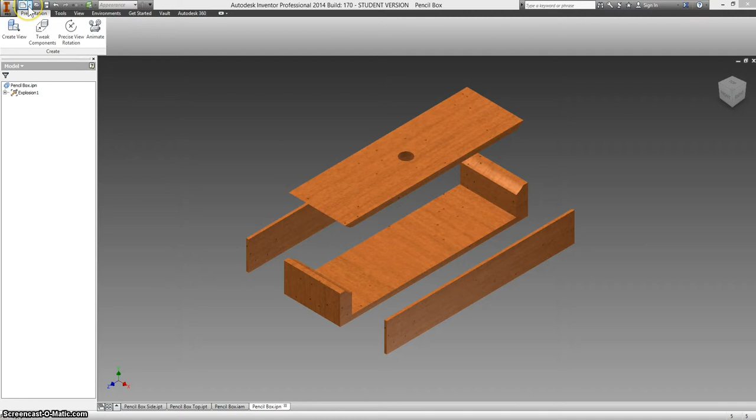We're making a drawing file. We're going to change this from C size paper, which is a little too big. So we're going to right click on sheet 1 and edit this. We're going to change this from C, which is 17 inches by 22 inches. And most paper is actually A size, that's 8.5 by 11 inches.

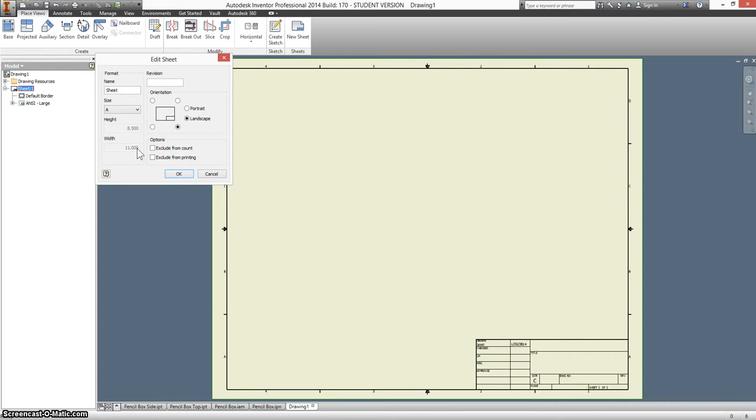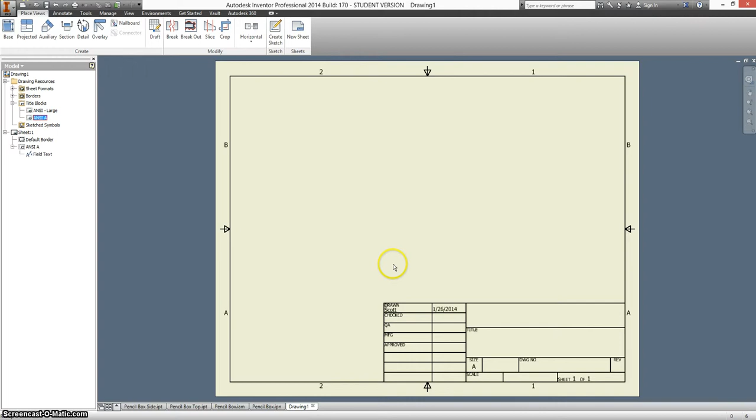So let's click OK. And now this title block is way too big, so we're going to right click and delete the title block. We're going to select a new one from Drawing Resources, so expand it, expand title blocks, and instead of ANSI large, we're going to select ANSI A. Double click. That makes a much more reasonably sized title block.

And now that we have all of that finished, top left we have the important part. I'll put in the base, and let's start off with the part that most people would start with. So we're going to browse and start with the pencil box base.

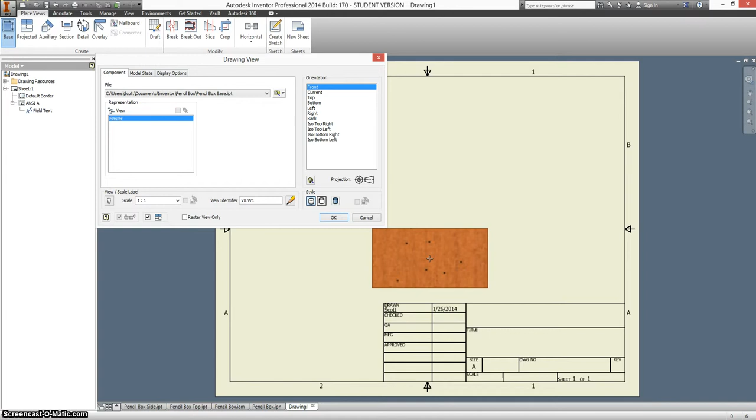Okay, now it thinks this is the front view, and this is actually a side that we're looking at. So the left side is probably more appropriate, but it's way too big for this paper. This is the actual scale, so an 11-inch long paper, this is 10 inches. This isn't going to work well, so we're going to change this to half size.

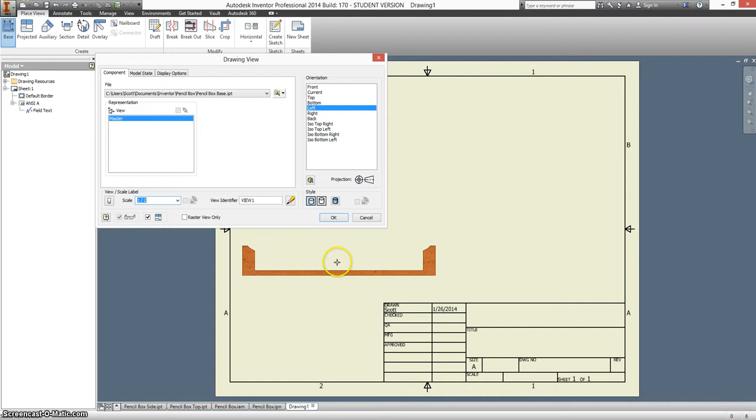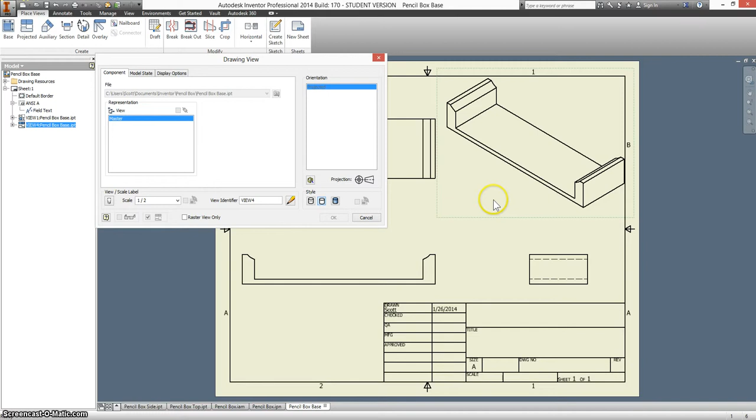We're going to click once to set down where the front view is, click the top view, down into the side for the side view, and then straight up from the side view to make an isometric view so they know what it is they're supposed to be looking at. Right click and hit create. Double click the isometric view. We're going to select shaded and click OK.

Notice that when I first put in the bases, I did not select OK. I just clicked on the paper where I wanted them to be.

We're going to go to annotate, and anytime that we add notes to a drawing, you're annotating it. So we're going to add a dimension, which is also an annotation, to show that from this side to this side is 10 inches long. And this is going to allow us to add extra text if we want it, and it defaults to let you do that for every dimension you create. We do not want to worry about that, so I'm going to uncheck Edit Dimension when created.

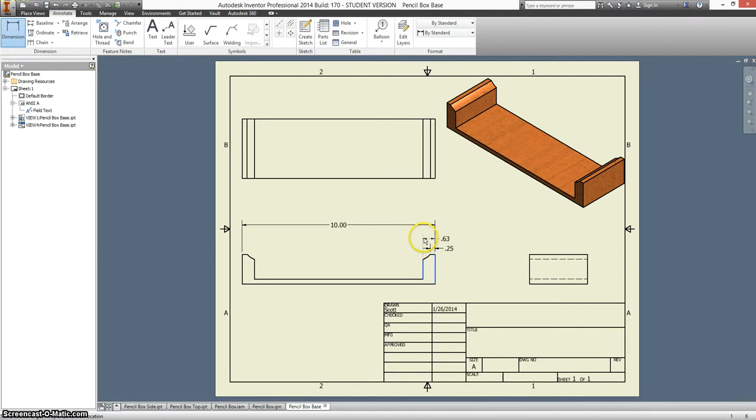We're going to also need to know how far it is to this first point, which we had set to 0.25, and this is going off the edge, so I'm going to change and make it on this side instead. So this is 0.25. I'm going to click on this edge again and say from that edge over is not 0.63, we said it's 0.625. So let's double click that dimension, and under precision and tolerance we're going to change it from only going to 2 points after the decimal to 3 points after the decimal, and select OK.

Alright, so these are all the width dimensions they would need to know. We'll put in a note to let them know that this side is the same.

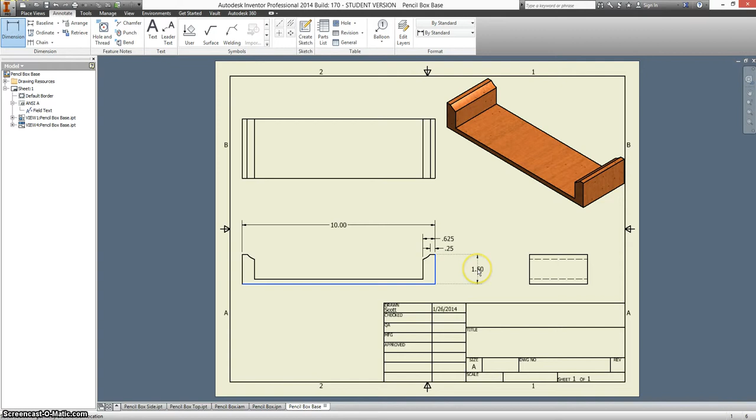And let's continue dimensioning. So we want from the bottom of this up to the top is 1.5 inches. From the bottom of this to this point should be 0.25, and that's showing up as something that's incorrect, so I may have to go back and look at that. And then the easiest one for other people to follow, even though it is the same as saying from here to here is going to be 0.125, we didn't actually dimension it that way. So instead, I want you to dimension from this point to this point, and that's 0.625.

Okay, and then the only other thing they would need to know is that the width of this is 3 inches. Remember, it started as 3.5. We took off a quarter inch from the left and the right side. And half of that quarter is from the table saw. The other half is the side that we're keeping for left and right.

So before I go further, well no, let's finish all of our drawings first. This drawing is finished, but we're going to add notes to it. So we're going to annotate it with text, and we're going to say symmetrical. So put your caps lock on. And that lets other people know that this side is the same as this side.

We're going to put in our name here. Forgot I had my caps lock on.

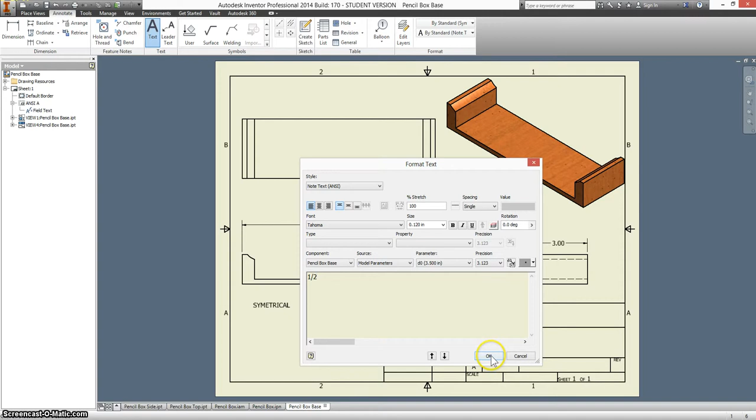Lastly, we do need the scale in here. And we said this is not a 1:1 scale, this is a 1/2 scale. So they know, looking at this, that even though this is only 5 inches long, this is representing a 10-inch long piece of wood.

Okay, now we're going to select Place Views and make a new sheet. So our old sheet is still here under Sheet 1. Our new sheet, Sheet 2, now already has the right size paper and the right size title block.

Click where it says Base. We're going to search for our side. And this is 3:1, this is way too big. Let's make this 1/2 scale.

Again, I'm not going to click OK. I'm going to switch this from a front view to a left view, and I'm going to click on the screen. Do not click OK, click on the screen. That sets the front view, the top view, the side view, and an isometric view.

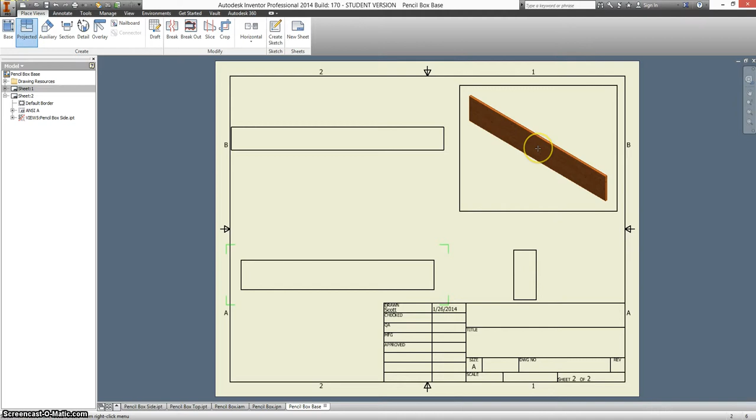Right click, select Create. You get a little red box if you're not right on top of the item. So double click that. We're going to make it shaded again.

And now we're going to go back and add notes to it. So dimension it first. We can just select the line and click above it. So it's 10 inches long, and it's 1.5 inches tall.

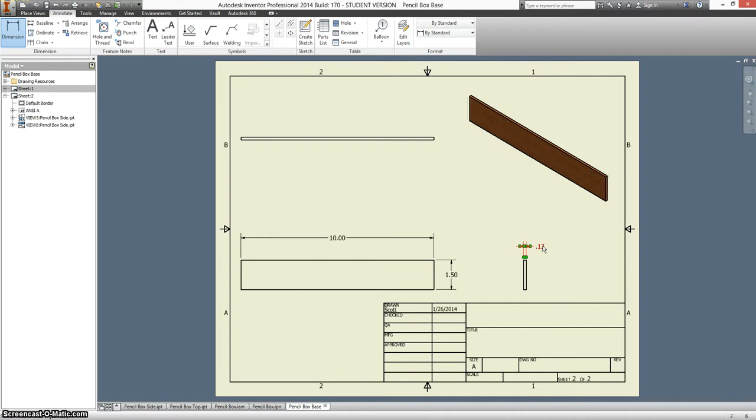And if we click on the left side and the right side, this will tell us that it's 0.13, which again isn't quite right. So click on that dimension. We're going to change the precision and tolerance to 3 points after the decimal. Select OK.

And again, we're going to add in your name. We're going to add in a title. And we're going to add in the scale.

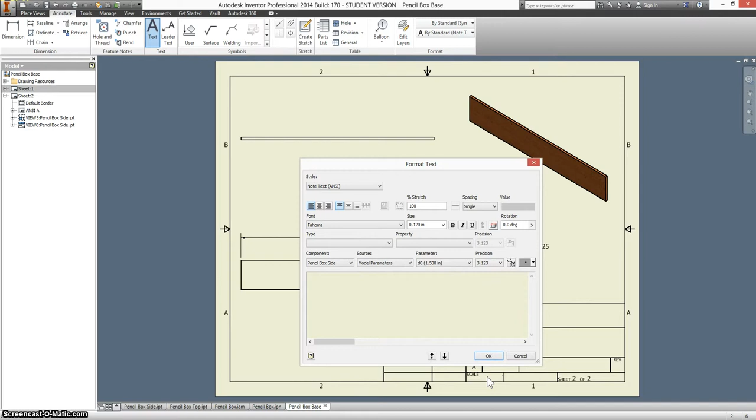Switch back to Place Views, New Sheet, Base, and now this time we're going to add in the top.

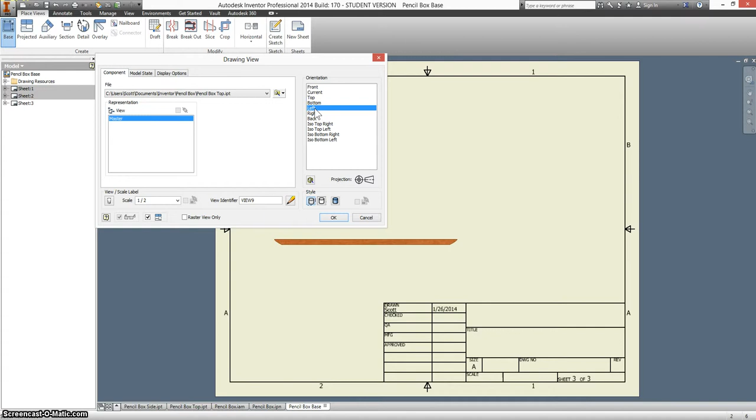I'm going to switch to a left view, and actually, let's see if we can get... no, it's not going to let me do what I want. So here's the front view. Do not click OK, just click on the screen. The top, the side, and an isometric view.

Right click, create, double click to make this one shaded. And annotate. This time we have a circle.

Anytime we have a circle in a drawing like this, we're going to add a center mark. Just click on the outside of it, and that'll allow us to dimension to it.

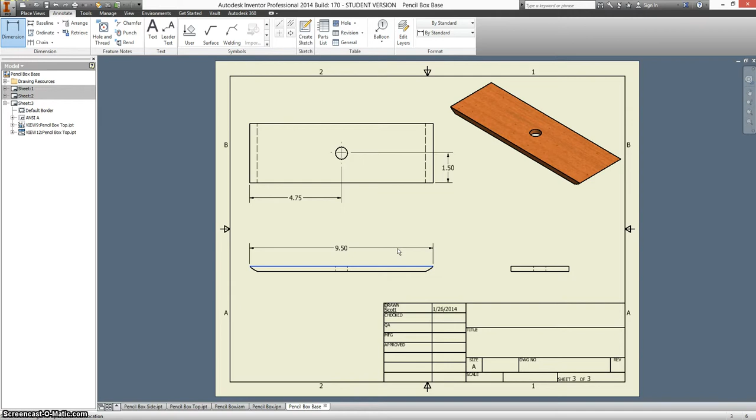So we're going to say from this edge to this point is 4.75, and from this side to this point is 1.5. This whole piece is 9.5 inches long.

If you zoom in, do not click on the green dot. Click on just above or below it. This is selecting a midpoint.

So you could say from this point to this line is a distance. We don't want to select that. We just want to know what the radius is. So the radius on this is 1 inch.

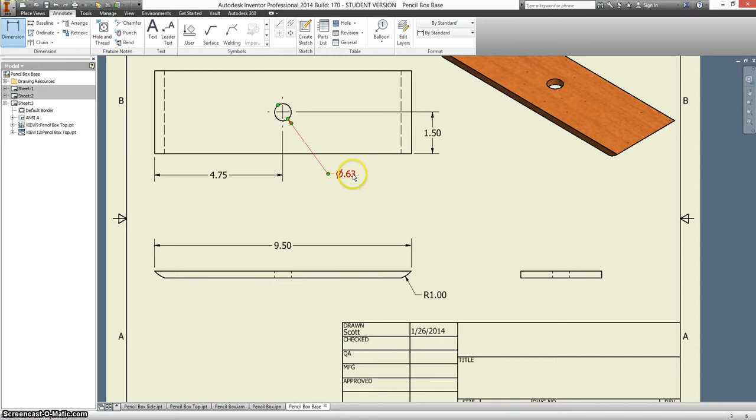And we also need to know that the diameter of this should be 0.625. So we're going to switch the units, make it so it goes 3 places after the decimal, and the last bit is just knowing that this is 0.25 thick.

We're going to add text to it. Again, put in your name, put in a title.

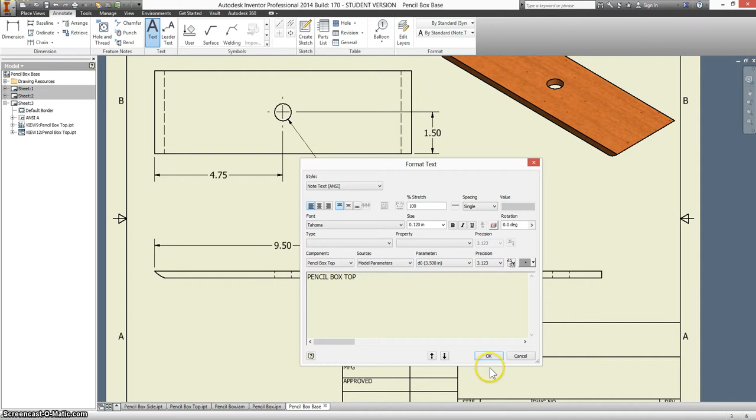If you hold down your mouse wheel and move your mouse up, it'll drag the screen. I'll put in a scale. The scale on this is again 1/2.

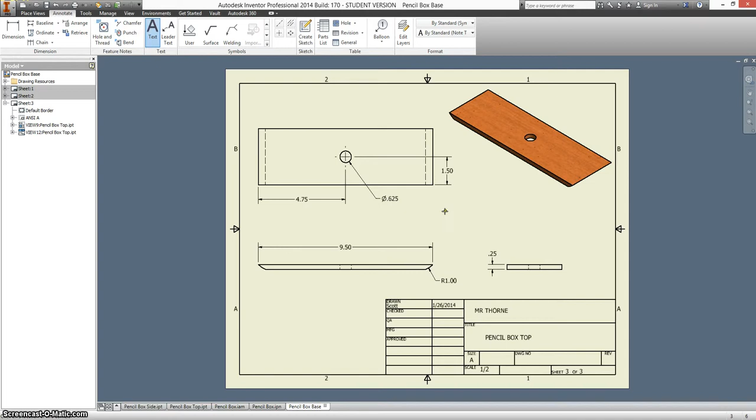If you double click your mouse wheel, it'll take you back to a full screen view, and we're ready to go to Place Views, New Sheet. We have one more sheet to add.

So here's Base. We're going to put in both the presentation view, which is here. We want it to not be a front view.

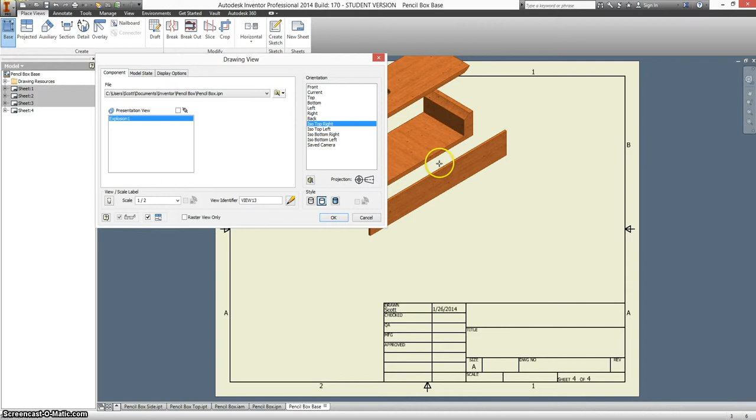This time we want it to be an isometric top right view. We want it to be shaded, and let's include the scale. So it's going to show the scale under the picture with this.

And that went into the wrong place. So let's right click, select OK. If we hover over just the words, they turn red, and we can move that outside of our title block.

We're also going to be annotating it by adding a parts list this time. Select parts list. It asks you to find what you're referencing, so you're going to be using your assembly view. Select OK.

It says that the bill of materials must be enabled to proceed. Do you wish to enable it? Yes. And we're going to click here.

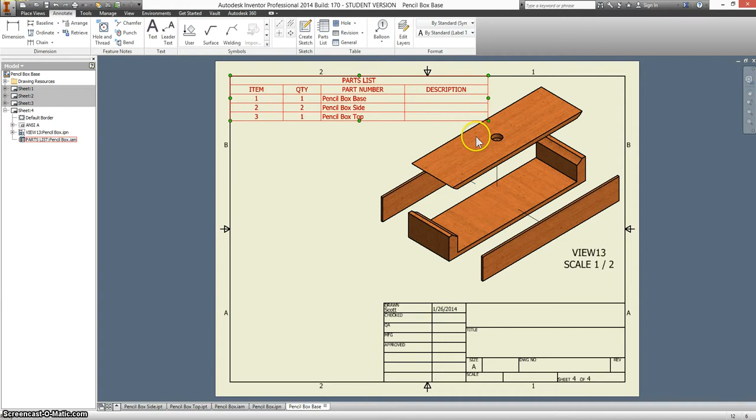And now our bill of materials is running into our pencil box, so it's going to get close to the edge of this red box, so we can drag it down just a little bit. Now it's above it, nothing's running into it.

If we double click on the text, we can add in our own descriptions. And this is actually not going to be cherry, it's going to be spruce, pine, or fir.

Highlight, copy, and then paste the same thing into the bottom two, or you could retype it and select apply, and that'll let anyone looking at this know that this is spruce, pine, or fir, and we need 2 sides, quantity 2, 1 base and 1 top.

Okay, last thing I'm going to do is add balloons. This is to make sure they know what is what. Select balloon first. You click on just the furthest out line you can for a piece, and you click a second time to set where the balloon goes.

Right click and select continue. So you click once on the outside edge of the object, once away from it, right click, continue.

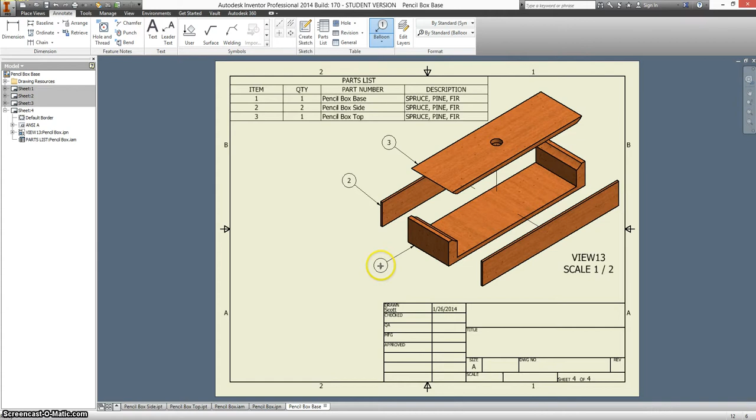Okay, and that's everything for this.